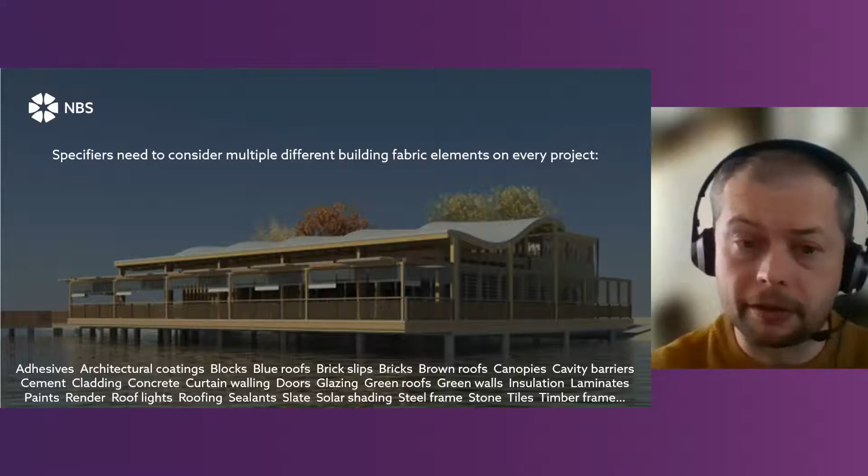So the NBS users, just to rule out some stigma that NBS is strictly for architects. It's not. Yes, we do have a high proportion of our customers that are architects. Pretty much most of the architectural practices that you'll speak to in the UK in particular will be writing NBS specs. They'll be using Uniclass or CAWS through NBS Chorus.

But alongside that as well, obviously through design and build, and utilising the specification information through the construction and procurement phases, the contractors rely on it quite heavily, but also consultants as well. Particularly now surrounding sustainability and safety, consultants are becoming more and more at the fore at the beginning of the design, and obviously the preliminaries within the specification, so how the work needs to be completed and the contractual arrangements around that, alongside the development spec up until it gets to stage 4 of the Plan of Work, is quite heavily involved and engaged through consultancies.

So yeah, it's a broad range of people that are using it and writing specifications. And likewise, so are the projects that they're working on. So no doubt, whatever sector that you're working in, the NBS system will be used across all the different areas. So whether it's education, leisure, commercial, or even residential, all of these things require that written specification. There's a hell of a lot that goes into it, but we'll cover how that works today and talk you through it.

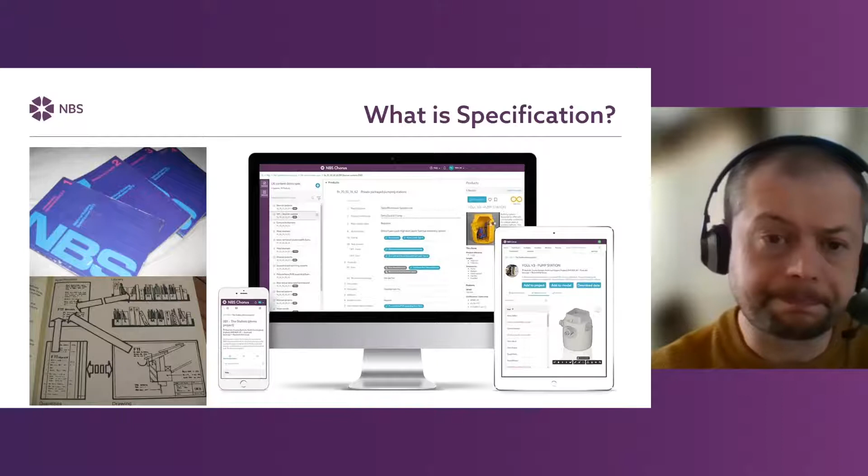The thing that we need to consider then is obviously descriptive versus prescriptive specs. And the difference between these two is a descriptive spec will explain what the product is and what it has to do. So in this particular example, this might be where if you've received a specification through to submit a tender for or to quote against, it might say contractor's choice or something on there.

But what it will dictate is we need a product. Say we picked insulation as an example. It might say it's got to have a certain U-value, meet a certain thickness, certain material type. But then it's down to whoever's procuring it to actually decide what manufacturer, which product it is.

With legislation changing as it is, and obviously particularly around the safety and sustainability elements, prescriptive specs are becoming more at the fore. So this is where the specifier is actually specifying who the manufacturer is, what product it is, with the SKU, the specific performance criteria of that example product that's written within the specification.

So there's a lot going on there, and from a spec breaking point of view, it's sort of aiding the value engineering piece where historically it's been seen, and to quote Judith Hackitt, as a race to the bottom. So prescriptive specs are becoming more and more favoured, but descriptive ones are still there. But there's avenues of how you can then get into those as well if you are a manufacturer. So yeah, there's a lot that's going on there, but I think the main thing to note is that it's changing, and specifiers are looking more and more to specify specific manufacturers' products and systems.

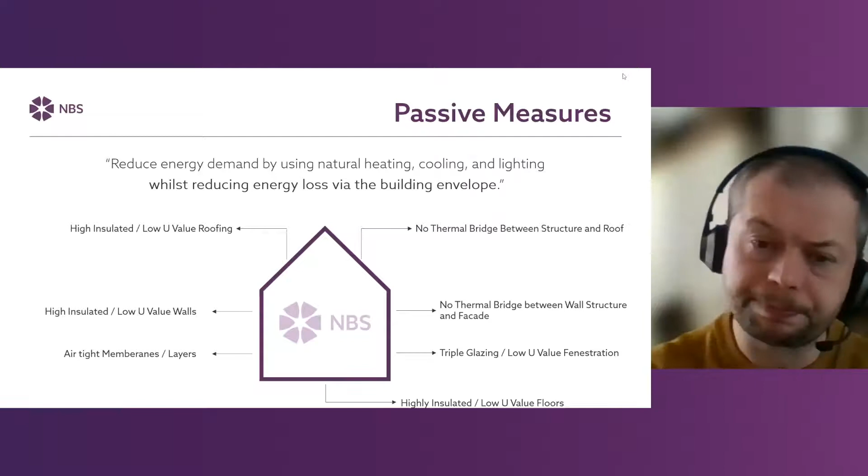So that said, how can you help the specifiers? So I think firstly, ensuring your product data is digitized would be the first recommendation. My prior role to working with NBS was actually as the BIM and digitalization manager for a large international manufacturer. It was quite shocking when we began the BIM process how fragmented the data was. It was held everywhere. It was on Excel sheets and PDFs. Sometimes it was in printed catalogs.

And quite often, and most manufacturers will have this, they'll have that 1-2 people maybe that have worked for the business for 100 years and they've just got all of it stored up in their head. Now, that's great, and those people are invaluable. But for the person that's sat at the other end of a computer as your customer, accessing that is really, really difficult. So getting it structured can not only help with your internal efficiencies, it can make the process of information throughout your own business a lot easier, and obviously lowers costs once it's done. But it also helps your customers and the specification community to actually do their job more efficiently. So the likelihood of them reusing you down the line is then built into that.

Providing third-party certification really helps, obviously around safety and sustainability in particular. This is a big focus at the moment. It's all well and good claiming that products meet a certain standard, or they've met a certain fire test, or they meet a certain U value, but if you haven't got somebody's independent verification to back that up, there is slight skepticism in the industry at the moment. It's not to say that what people are listing isn't honest, but if they've used in-house testing, it might not always be clear how that test was developed. So third-party verification is a great thing to do. And likewise, have that listed with the information associated to the specific product, and it can help ease the pain for the specifier when they're looking at that.

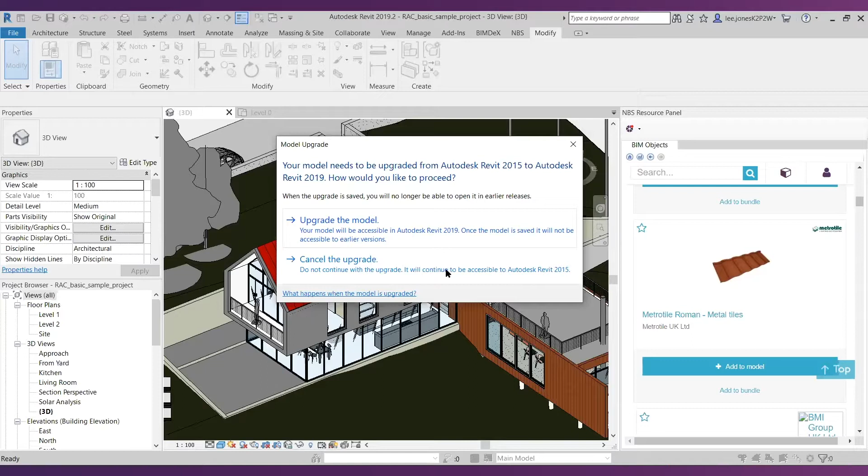You'll note that it's saying here update from 2015 to 2019. BIM software isn't backwards compatible with revisions of software. So what we have to do is create the objects in as early a version as possible, which then means that regardless of what future release of the software your client's using, they're going to be able to open that and access it. So we just click upgrade for the first time. It's then going to open this object.

And you can see that we've now got the Metrotile UK Limited metal tiles. We've got a little model there, something very basic with it being a roofing object. In this particular case, if it was a window, it'd be more three-dimensional, obviously, to suit the profiles, etc. But what we can see if we click on this now is within the data set, we've got all of that manufacturer's information.

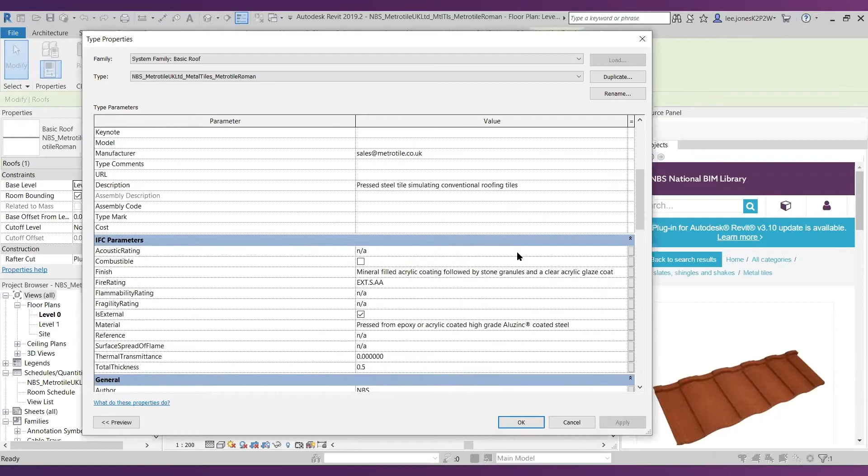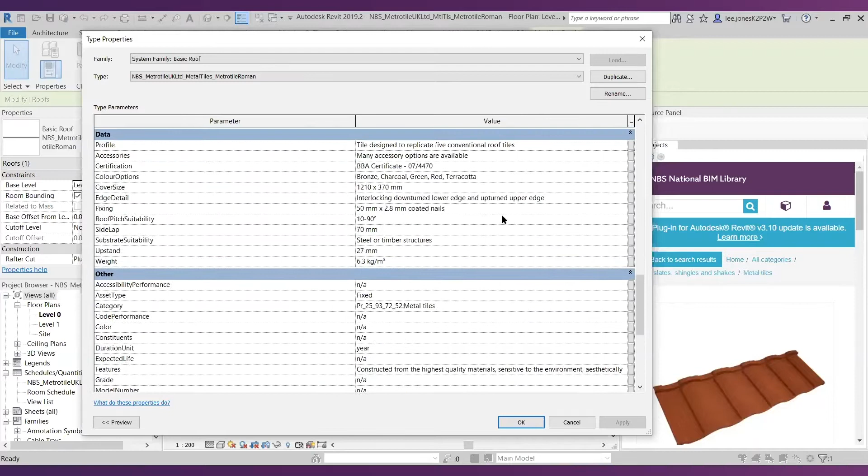So gone are the days when you used to have a separate CAD drawing, or back in the olden days, even a board drawing with a disjointed spec, separate material takeoffs, etc. It can all be scheduled and done now directly from within the model itself. So all of that data inherent to that product, whether it's performance criteria, information relating to the warranty, the sizes, dimensions, links to the product information, data sheets from the manufacturer or their website are all contained within this.

So I'm just going to copy this onto my clipboard and then jump into that 3D model that we just had open. And then I'm going to paste that into this model. Nice and simple.

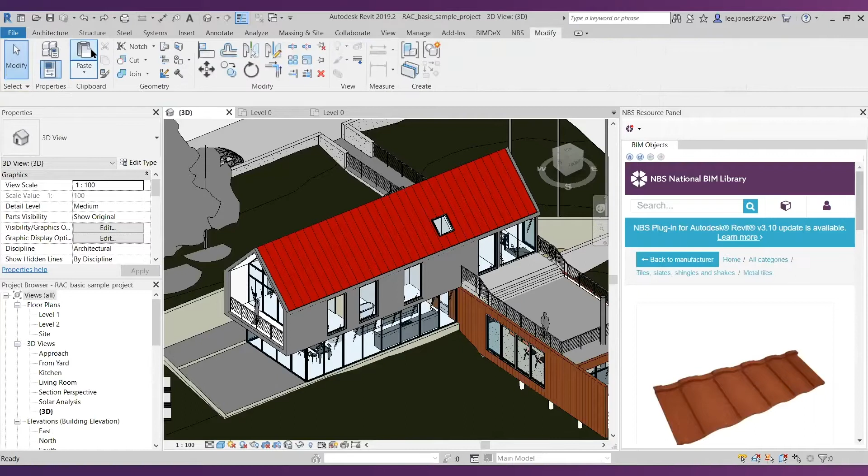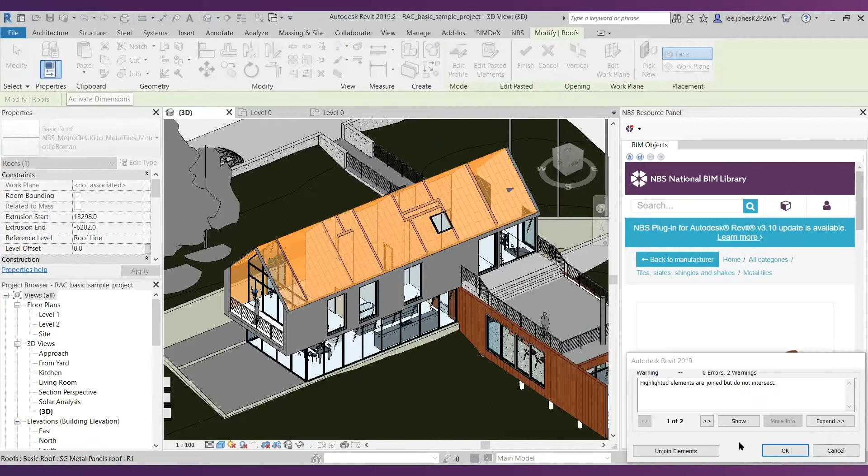Works very, very easy. And we've now got that in there. Obviously, we don't want to leave that on the floor, so we'll just delete it out. Now, what I can do is the generic roof that we've set up originally, I can select that, and then I can go into the list of the things that we've picked here. You can see that we've got some other options that we might have used elsewhere, but the one that we've just dropped in is this particular one, and we can drop this in, click OK, and that's now added that in.

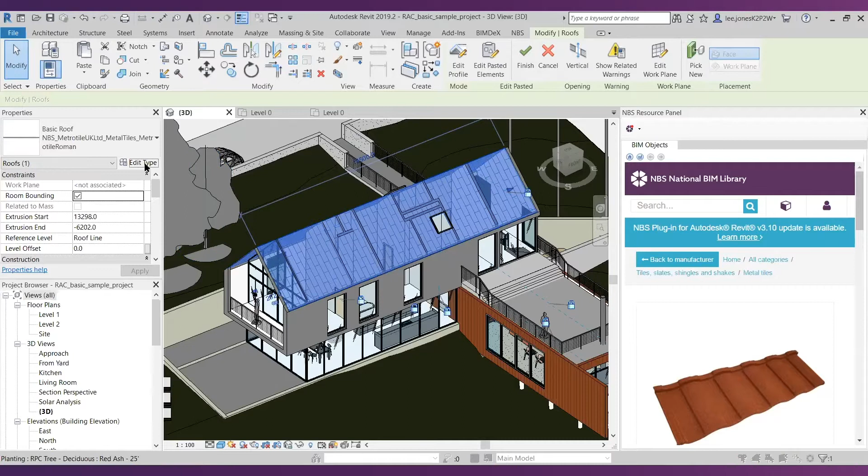There will be some adjustment on thicknesses. Obviously, we've just gone from, I think, a really thickly insulated metal tile roof system to quite a thin metal tile with no insulation, and so there'd be some adjustment there. But if we now click on this, what we can see is that all of the data that's relating to that product is now within the model itself, and that can be scheduled. You can work out the square meters of your roof, etc., and so forth from within there.

Additional to that, what we can then do from within the software itself is we can actually access the specification. Now, what we can see here on the right-hand side is NBS Chorus, and that spec that we were looking at earlier on within the software itself can be accessed from within there as well. We can sync it to the model, so we can actually attach the building component to the specification. That's great from a perspective of making sure that the model and the spec are tied in together.

It also will flag up any errors if somebody changes the spec or changes the model and the other one hasn't been updated, to make sure that the two are both kept aligned. It can help strengthen the potential for value engineering to make that a bit more difficult to do, obviously, in having to update two different documents in one go. But more importantly, make sure that what's been specified and what's in the model are the same to ensure that the building is as safe as possible as well.

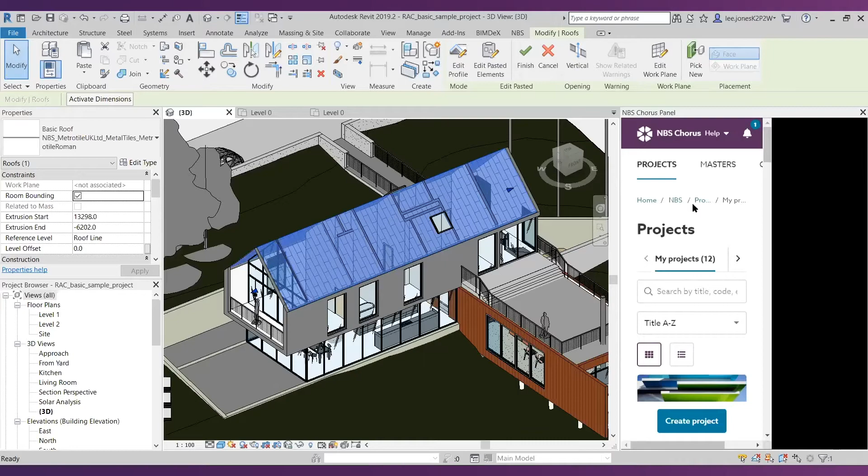Okay, so that was the NBS demonstration of the platform. I hope you found that useful. I'm just going to do a wrap up and summary. So key takeaways, I think first off, to get specified, engage with specifiers early. You can do that through BIM content and quality specification data. So it's something that you need to consider if it's something that you're not doing. The products are in demand through the NBS platform at the moment. We've just seen an example of that through the demonstration.